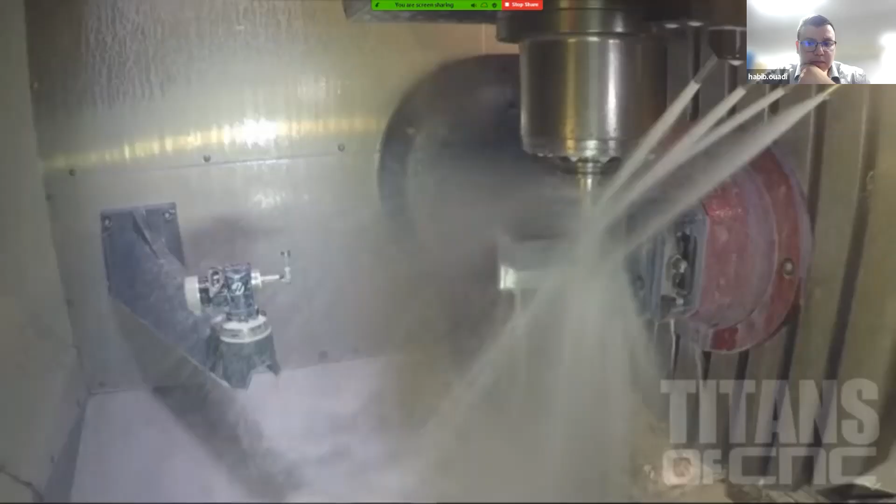I'm going to explain the difference between a manual machine and a CNC machine. Manual machining is dear to my heart. 20 years ago, when I got into this trade, when I didn't know anything, I was put on a manual machine. It's how I learned how to cut metal. A manual machine has hand cranks—we say hand cranking.

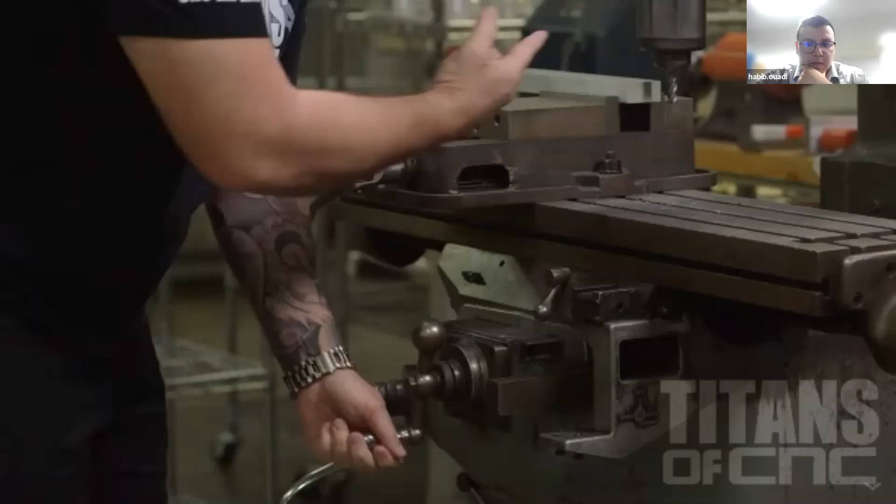In the Y direction on this machine, we rotate the handle to engage the tool into the material. In the X direction, we rotate this handle. In the Z direction, we lift up the spindle and lock it down. We also can engage Z-axis by raising or lowering the table—cranking the handle actually raises the table. So now let's go look at the CNC machine.

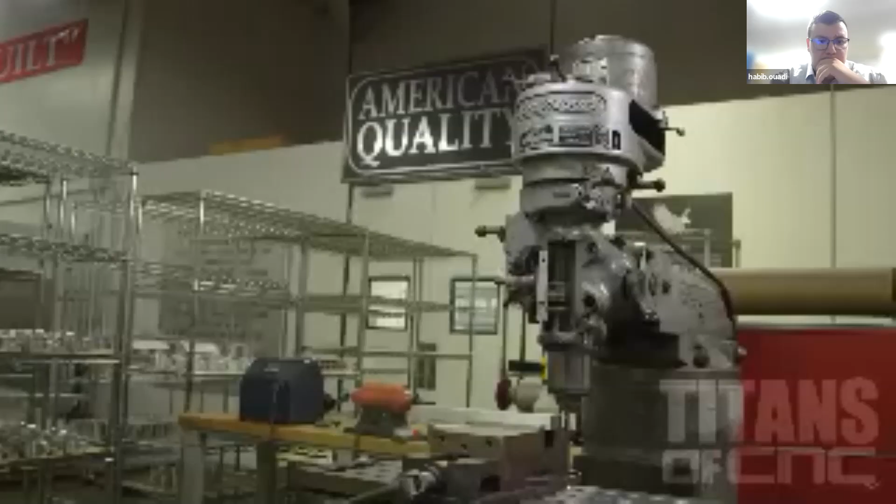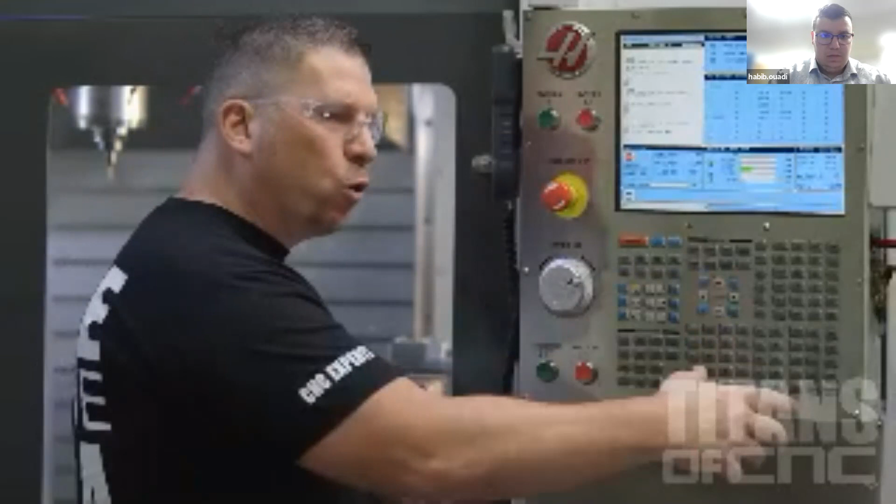All right, so here we have a CNC machine, computer numerical controlled. Just like the manual mill, we have the same axis of movement, but now we have servo motors actually controlling those axes. With the CNC machine, everything is automatic, and we run off of G codes and M codes.

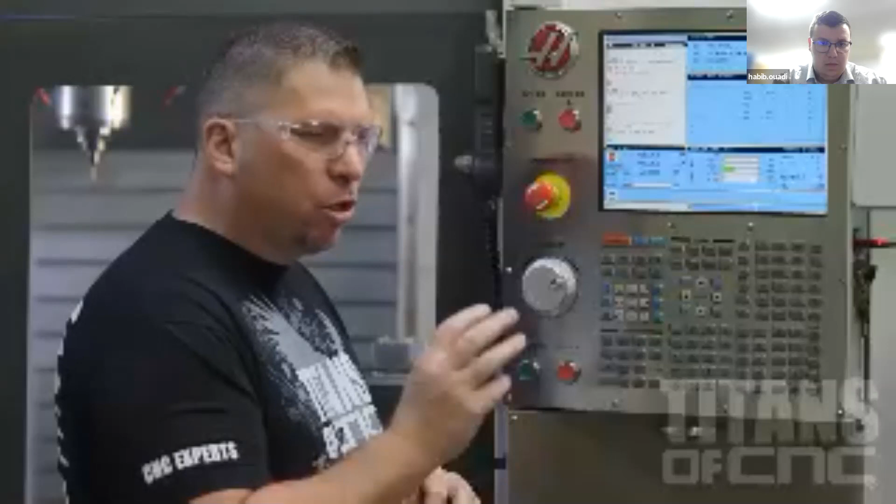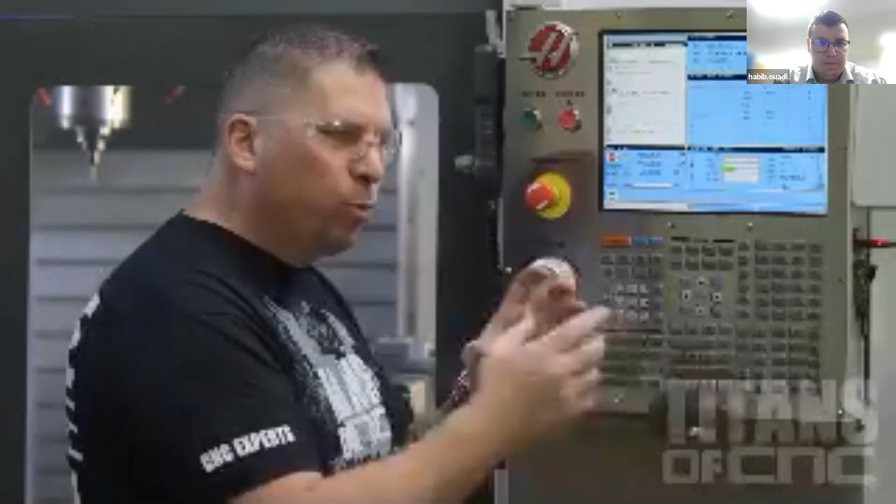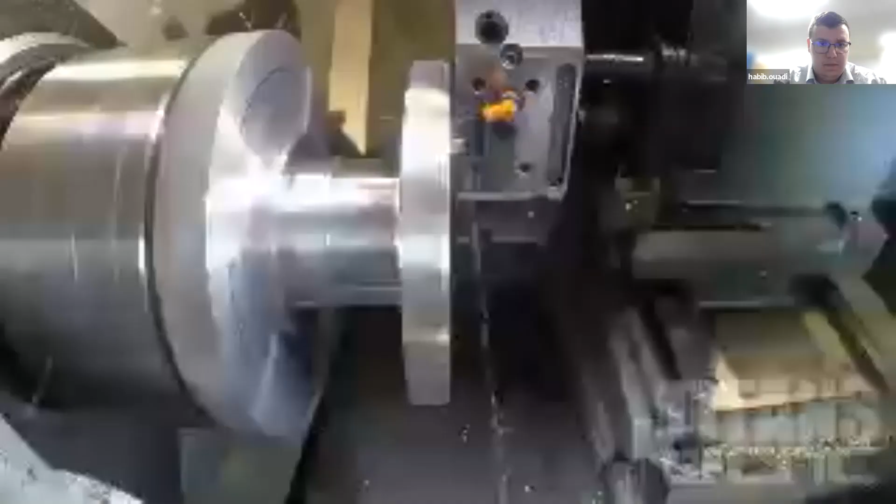The programs are created through a CAD/CAM system. We take a solid model and bring it into the CAD/CAM system, like Fusion 360. Then we call tools, call out profiles, and run the tools around the profiles to create a program. Once the program is complete, it gets posted. We then send the code to the machine. The machine reads the codes, grabbing each tool and running it exactly like we did in the CAD/CAM system.

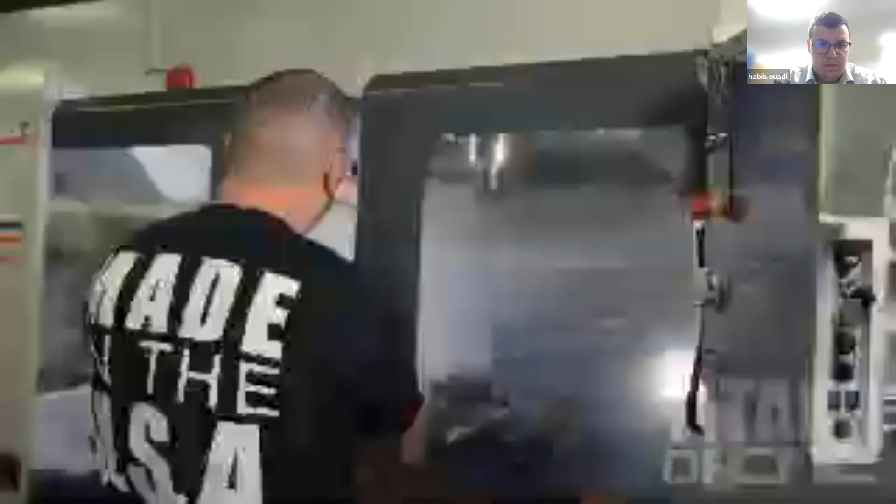You gotta grab all the tools, put them in special holders, and then put the tools in the machine. You have to zero all the tools to the part, and then zero the part, and then you're ready to run your program.

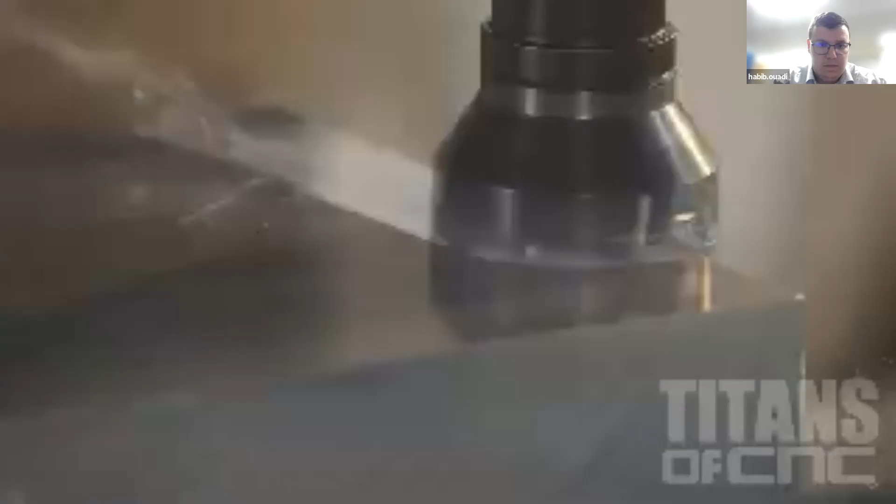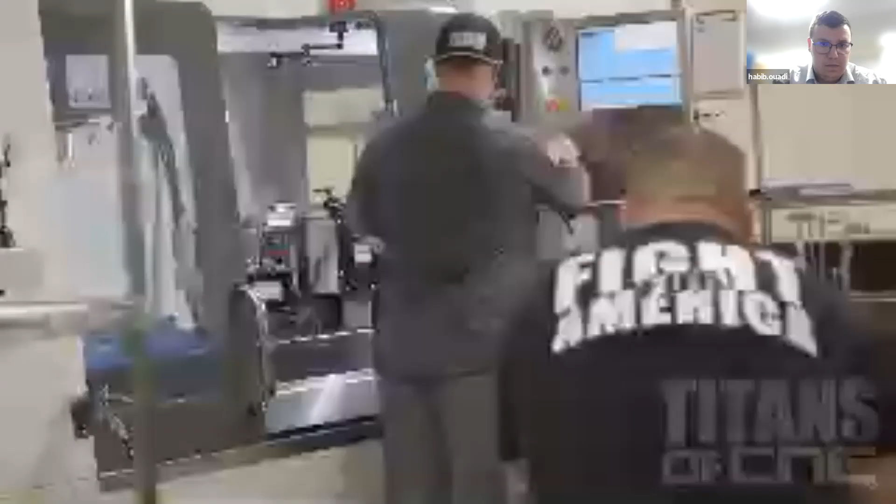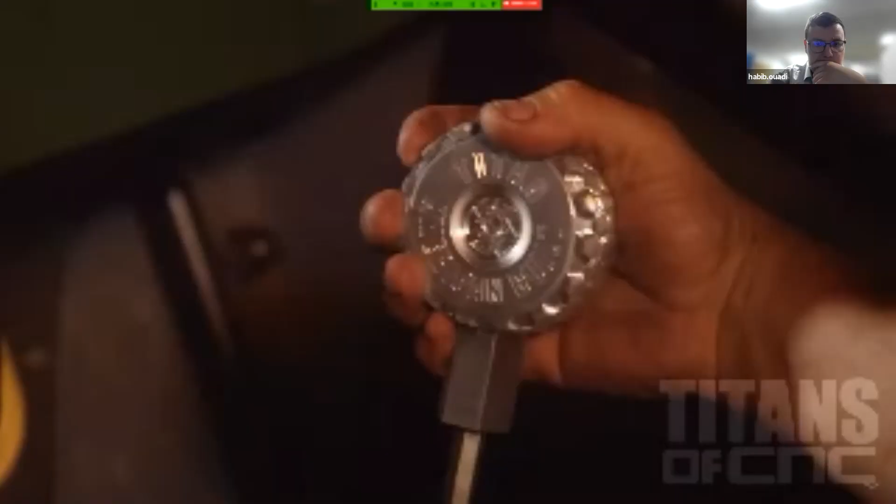When we look at runtime, manual machining cannot compete with CNC machining. You can make this machine run lightning fast, non-stop, with no operator. Everything is automatic and efficient. It keeps my workers busy. It makes me efficient. It allows me to quote work and get those jobs so we can make parts that go on submarines, on rockets that go to space, and everywhere in between. If I didn't have a CNC machine, I would not have the work and I would not be able to employ my guys. Taking it all to another level.

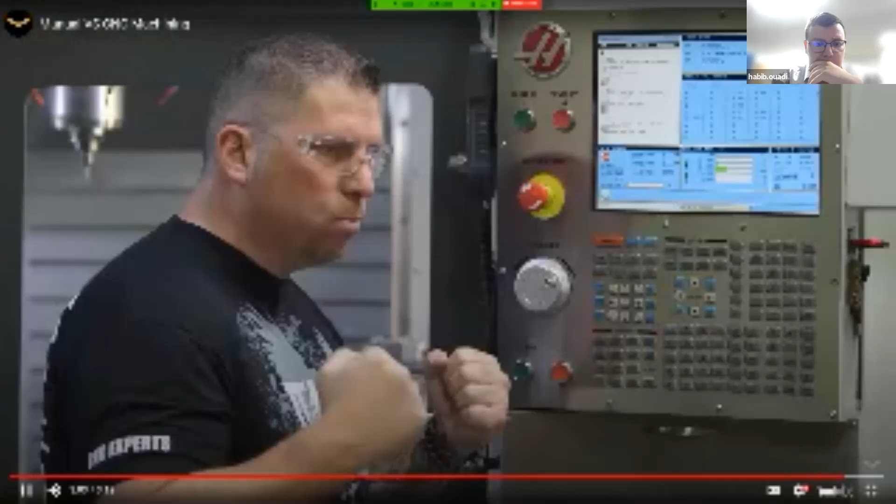All right, so I hope you enjoyed the video. Let me just go back to the slides, and while I come back, I would like to ask, what kind of keywords did you hear there in that video that will apply to what we are talking about today? Anyone?

Numerical control. Yeah, a program, control, code, runtime, fast, automatic, efficient. Exactly. Automation, right? Complexity as well, right?

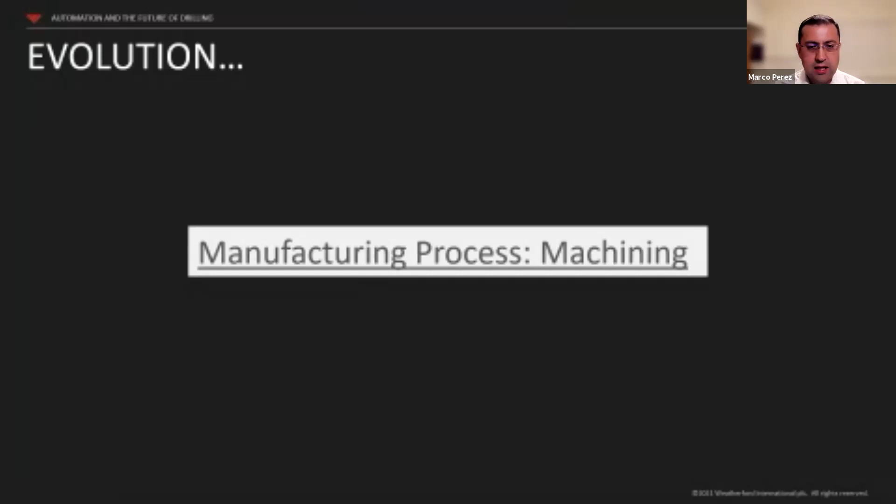I mean, he didn't mention it clearly, but definitely the type of pieces or components that can be manufactured on a CNC machine is far beyond, or far away, from what we can do with manual machining—or what they can do in manual machining.

In our world, when we are drilling, wells are not getting easier. They are getting more complicated every time, as we try to reach new targets—longer, deeper, higher temperatures, and so on. So our environment is not getting easier, it is getting more and more complex as we go. But as you mentioned, automation, running time.

They talk about zeroing in all the tools and all the pieces. So it has an additional time to set up, but then once it is set up, the running time is significantly shorter than if they have to manufacture that with manual machining.

So I thought it was a good illustration to see the similarities that we have and the challenges that we are facing in our industry, the oil and gas industry, and how other industries, in this particular case the manufacturing industry, have been evolving and basically being competitive and able to survive in that business environment. This evolution is not happening just because. There is always a reason to be more competitive, to be more efficient, and to make better business for the companies, whether operator, service company, whoever. At the end of the day, it has that reason. This evolution is good, but there is a fundamental reason for that.

So now digging deeper into the topic of automation, and again making an analogy to what we have seen in the vehicles we're driving today versus what we were driving 20, 30 years ago. Right now it is very common to have vehicles with, for example, ABS systems, the anti-lock system for the brakes, or cruise control, or a few other things like fuel injection.

And if we look at the reasons behind that, it comes back to what we discussed on the previous slide: safety, definitely it is important, and service quality. Service quality is what is going to make us more competitive. Whoever is offering better service quality is gaining market, gaining business. That is pretty much a must and is part of the evolution.

Now, the question is, is this happening overnight? Well, the answer is no. As I was just saying, the evolution in vehicles has been across several years. It is gradual but continual. We need to keep moving. We need to keep evolving.

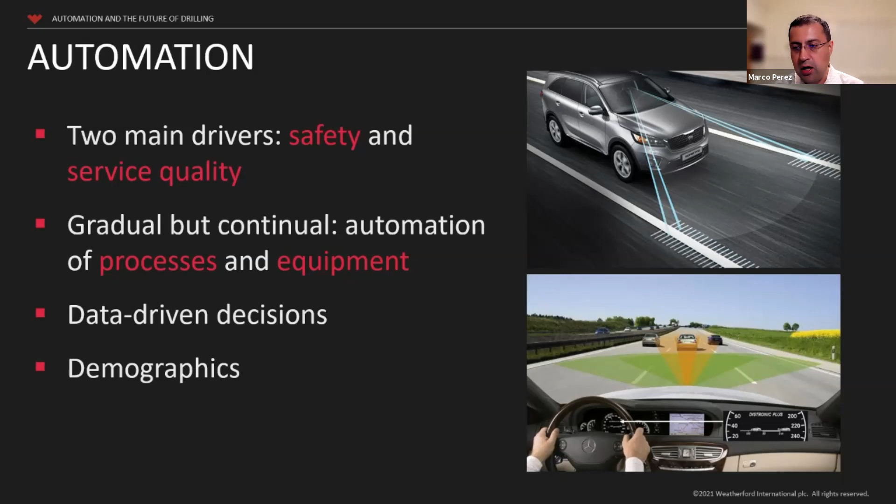So that is the other point that I want to highlight on automation and why we have this type of evolution in our industry, or we have been having this. Now, the foundation for the future, moving into the second section of this presentation. Based on our perspective, we have 5 main pillars on this foundation for the future.

The first one is data visualization. We have been making a lot of good progress on making the data available and being able to visualize it quickly and in the best possible way. The second one is embedded analytics. Obviously we have the data, but we need to be able to analyze it, as I mentioned before, to have data-driven decisions. The third one is basically an open architecture. We cannot just restrict our progress just to ourselves.

We need to be able to connect to other parties, other systems, and speak a similar language. We need to understand the same thing and be able to integrate into the major workflow of the process. Then the other one is the high frequency and high density of data, so that is all important to manage volume of data and integrate that with our analytics.

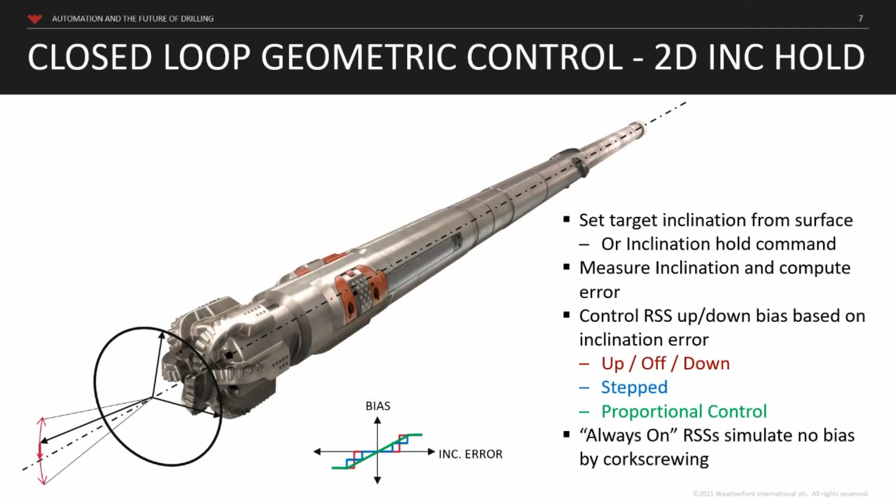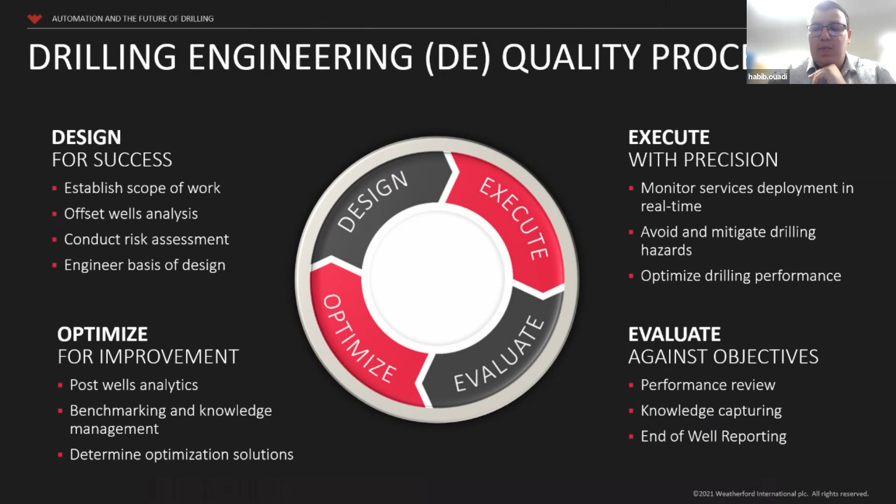Marco, I have a question regarding the previous slide. You said execution, and you said avoid and mitigate drilling hazards. Is it like taking decisions, or just how it mitigates, like detecting the problems or taking decisions? Right, so it is actually taking decisions, we call it interventions. Once we start drilling, I have an example in the next couple of slides. But during the execution, we have basically a driller's roadmap on how it should go sequence by sequence. If we have deviation from there, or if we foresee a risk coming up, we need to take proactive action to make sure we don't get into a bind. We need to probably control ROP or control ECD, or circulate more, or increase the flow rate, or whatever the case may be. But it is an actual intervention, that's how we call it.

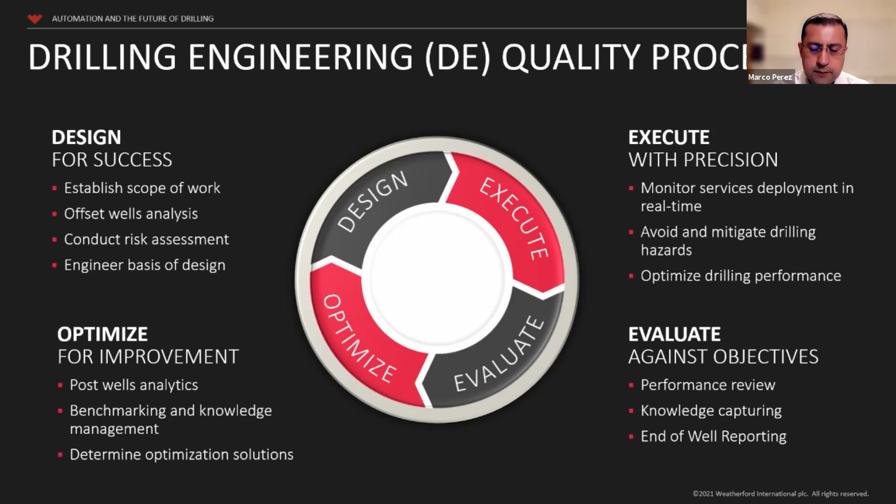Okay, so once we have our game plan, we have the design phase completed, what is the first thing that we need to do? Well, the first thing we need to do is start drilling, right? We need to start manufacturing the well. We need to start digging some hole in the ground. So now I'm not going to expand into the directional drilling here.

I'll assume you have some background on what a rotary steerable system or directional tool is. In reality, over the last 20-30 years, directional drilling tools have been evolving significantly. What I'm showing here is just an example of a rotary steerable system, and the key points we want to highlight are the most recent advances in this technology.

Right now, pretty much every well we are drilling requires a certain degree of directional control, even vertical wells. So in pretty much every well we will be having a directional control tool. There are two main bullet points I want to highlight here.

The first one is setting a target inclination from surface. This is similar to when you're driving your car and you press cruise control - your car goes at a certain speed that you set and maintains that. Basically, it's the same thing here.

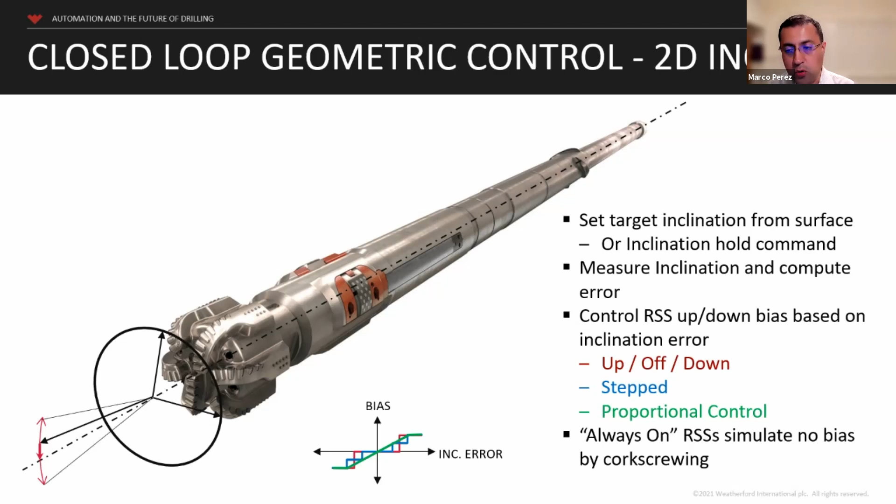When I was doing drilling engineering a few years back, I had to monitor 3-4 rigs, and typically communication was just email, or they'd send you the logs. You'd need to open or print the PDF, look at the log and drilling mechanics logs, and identify if there was an issue with the ECD, equivalent circulating density, or with the formations we were drilling. It just took a lot of time to do that process.

Every morning you'd start looking at the rigs and how they were performing, and it was just taking a long time. Even just plotting the directional performance - you typically had in the past a wall plot, and you'd have to plot surveys in there with a pencil and things like that. It was just taking so much time to do all that.

Now we have all these platforms to monitor, and not just to monitor - in this case it's automation of drilling engineering modeling tasks in real time. So we have all this at our fingertips, and that will make us more efficient. It will move us to the next stage, which was part of the question I got before: is it just monitoring? No, it is not just monitoring.

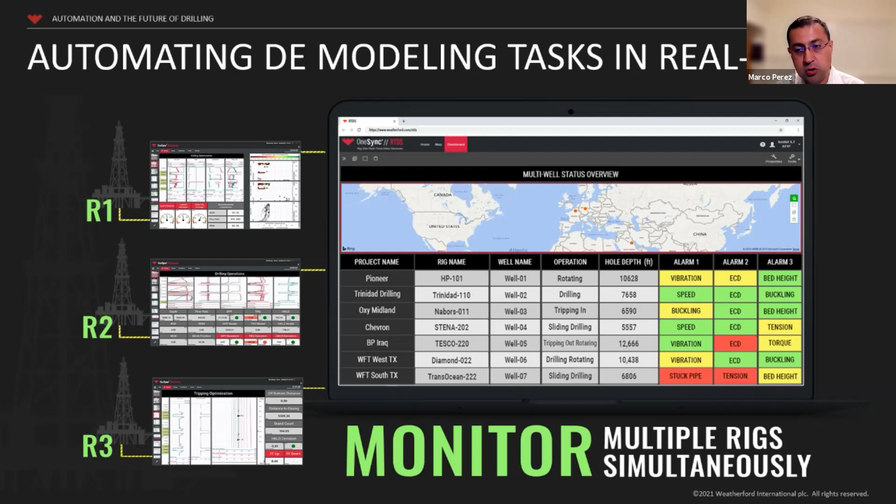Real-time vibration analysis. During the design phase, we evaluate the vibrations on the BHA, but then during execution many things can change. So under the new actual conditions, we run this in real time and validate that the drilling parameters we are running are giving us the best possible conditions for the BHA to survive the drilling environment. We have downhole sensors feeding back all this data into the surface system to evaluate the lateral vibrations, torsional vibrations, axial vibrations, and so on.

Now the MSE, the mechanical specific energy, is also a very important parameter. It basically tells us how healthy we're drilling this hole - are we using all the energy to really destroy the rock, or are we losing energy, for example in vibrations, or due to an issue like bit balling or whatever.

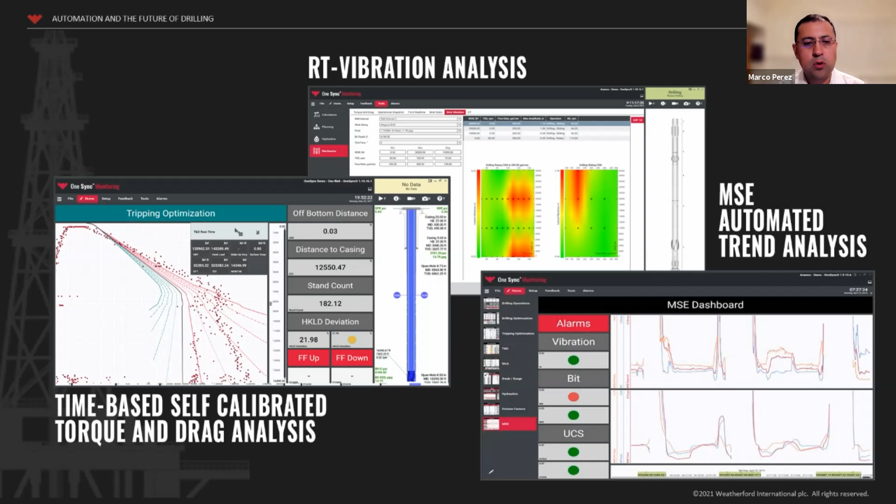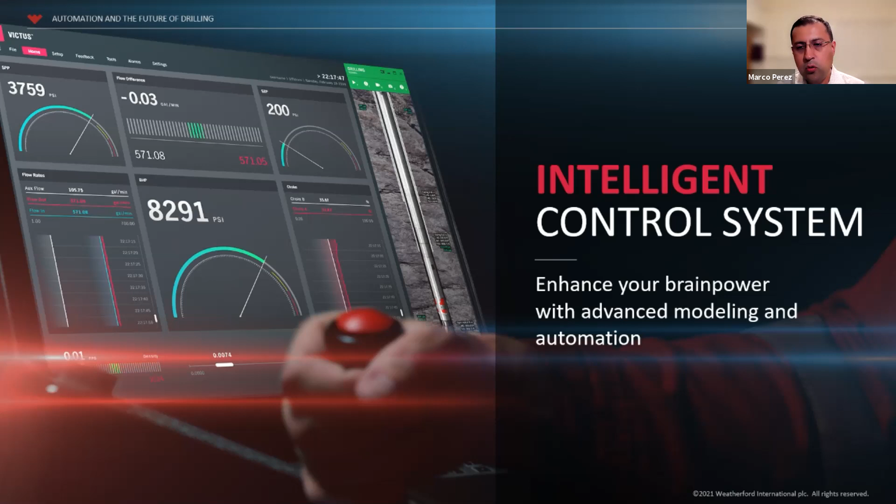Now, following the conversation about risk mitigation and optimizing performance, let me just briefly touch on MPD - managed pressure drilling. Probably you are aware of this technology, this type of offering that we have. Now what we have been doing with this technology - I mean, it is not new, but what is new is how do we control this. And to control this, let me just move to the next slide.

So what we have behind the intelligent control system is, first, the advanced hydraulics model - that's a given, so we have software, we can calculate our hydraulics, we can estimate our bottom hole pressure. Now we develop these smart control algorithms - we need to have this additional enhancement on our brain power, things that probably the human brain will not be able to detect or analyze in the time frame that we need to.

And then the integration of those algorithms into the PLC system, the programmable logic controller. So it is not just the model, it is not just the decision, the algorithm - it is the execution, the PLC in there. And then obviously we need to have a simplified user interface and alerts to the operator. So that is what is behind this intelligent control system. Now the benefits, the results, is condition-based monitoring - that is basically the maintenance program for the equipment that we have - and reliable automated reporting.

Obviously, we need to report what is happening and how we're addressing certain conditions, specifically how much back pressure we will be applying to keep the well in the condition that we want, and then remote control via a single user interface. So we were talking about having just one platform, one simple architecture where we could incorporate different systems into just one.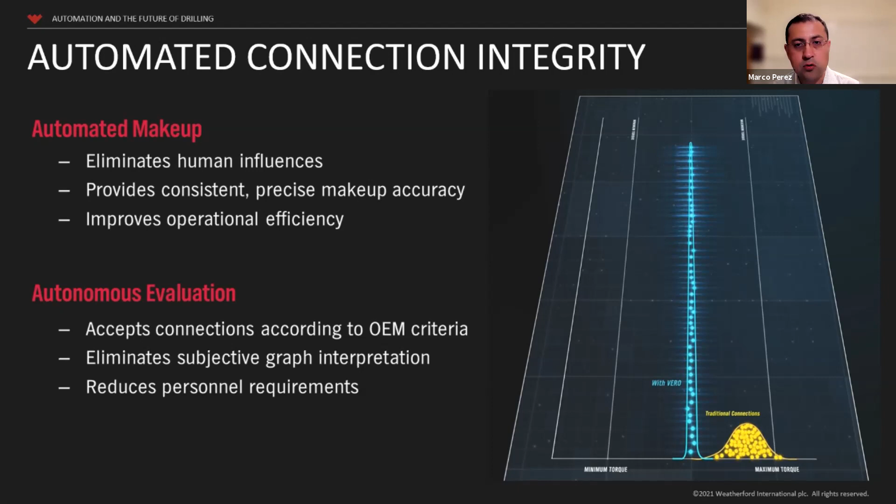Now, let's say we drill the well, we case the well, and it has the required integrity. What is next? Well, obviously we are drilling a well not just because—we're drilling the well to put it on production, or to enhance production if it is an injector, and so on.

We need to make it, to produce, right? So that is the objective of having this well and spending all this money drilling this particular well. Let me just quickly check the time. Yeah, we have a few minutes.

The objective here is regarding Industry 4.0, how we have adopted some of these fourth revolution concepts, taking processes optimized in other industries into the oil and gas industry. I'm not going to get into too many details, I'll assume you have some idea on Industry 4.0. But the point is how we can take those learnings and developments and apply them into our production environment in the oil and gas industry.

One of the main challenges was to integrate all the enterprise systems. How can we integrate all of them and have just one single platform for the operator to manage assets or manage the wells, and to adjust and get the data in real time, adjust the production and so on. So that is pretty much part of the automation.

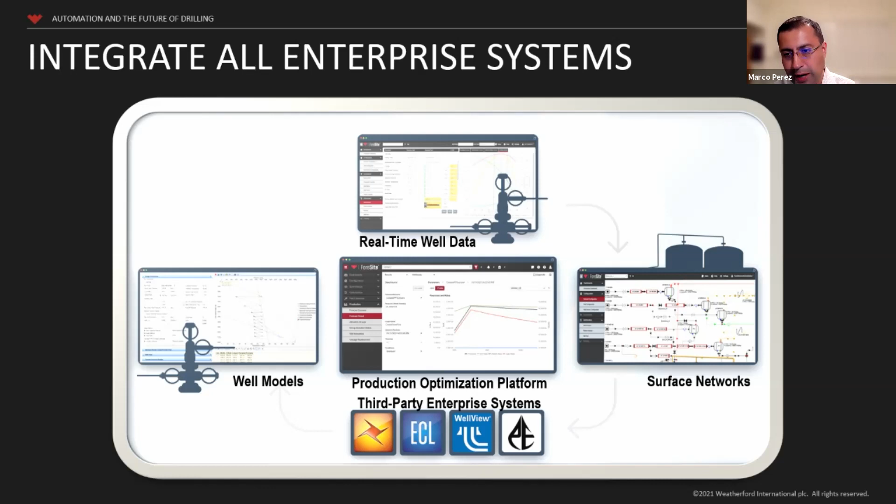Now moving into the third section of the presentation, the future of future technology. What else do we foresee going forward?

Let's step back a little bit and think on what we are doing. We're drilling wells, putting wells on production. Typically the operator has a certain number of rigs and wells that they need to drill and complete in a year. When the drilling managers and operations managers get that information, first thing is just instinct: they try to drill as fast as possible to meet the manufacturing schedule set at the beginning of the year. That sometimes deviates attention from the details that really impact the long-term goal.

In my mind it's basically drill smarter, not just faster. It doesn't mean drilling faster is bad, it just means that sometimes we focus too much. If you just focus on ROP, on drilling faster, looking at days versus depth, it is not going to get us to the end goal. It may give us a good leeway into the initial part of the rig schedule, but it's not going to efficiently meet all the manufacturing schedules.

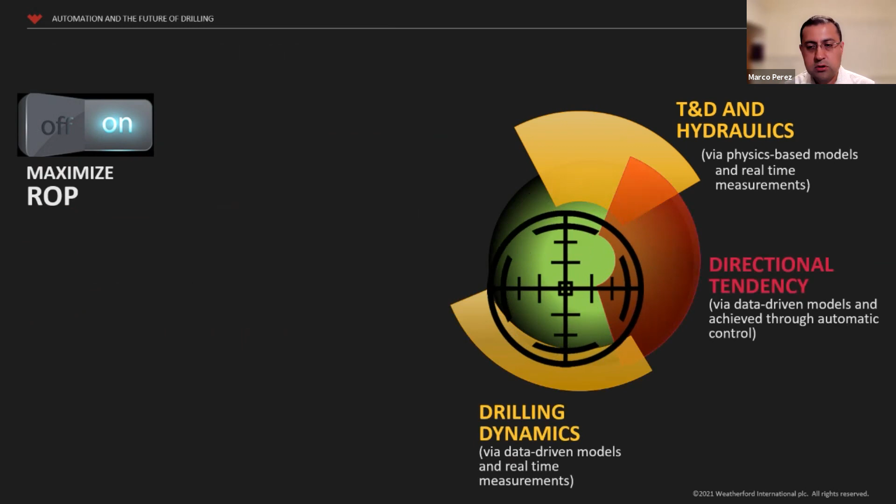So as I said before, while the ROP is high, everything looks good and there's no issue. But if we start having problems, they can get escalated quickly if we're not prepared to manage those contingencies. So the point is we need to think on how to maximize ROP, but not just looking at ROP, looking at all the variables you see in this image on the right.

How can we target the ROP that is optimum for this particular operation, based on the rig capabilities we have, the well profile, torque and drag, hydraulics, directional tendency, drilling dynamics, wellbore quality, and the hole cleaning pressure and ECD management - and optimize all of that.

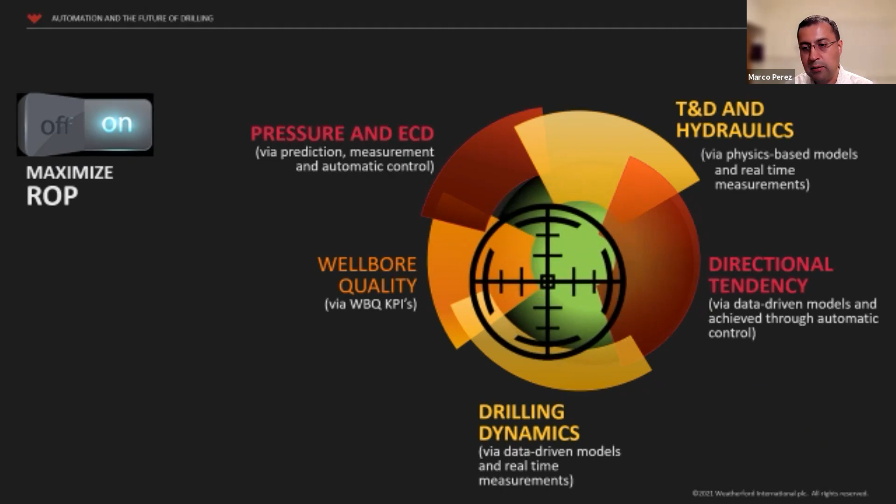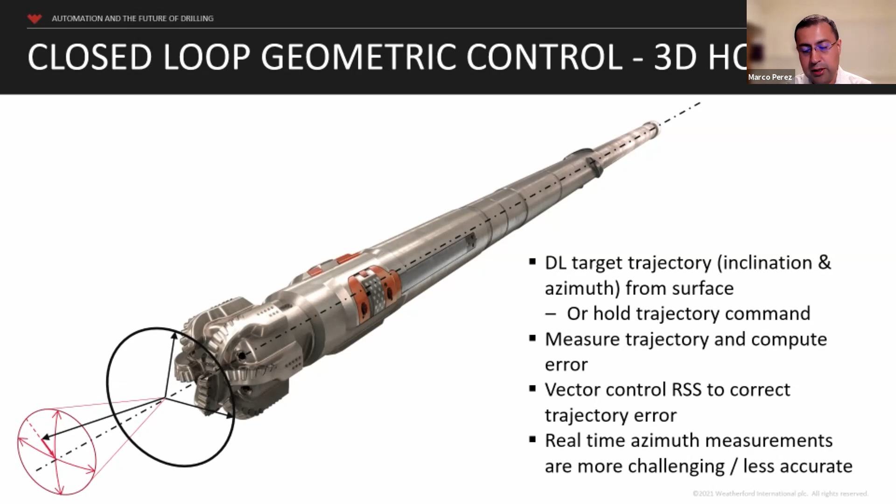So that is where the next step is, that's where we think the future is, and by having that, we think it's going to be a major differentiator.

The other one is production, right? Many times when we drill these wells, not all of them are laterals or require geosteering services, but many of them do, and especially with one well, if you can navigate through this pay zone and extend the length of that lateral and extend the exposure of that formation, it will translate into better production for the operator, right? Better well, better asset that the operator can keep.

So getting into the conclusions here, let's see, yeah, we still have time. So the first one that I have is manufacturing and industrial practices have been leading the recent oil and gas evolution. I think there is a great similarity between manufacturing wells and manufacturing another component, not just in the technology being used, but also in the processes being used.

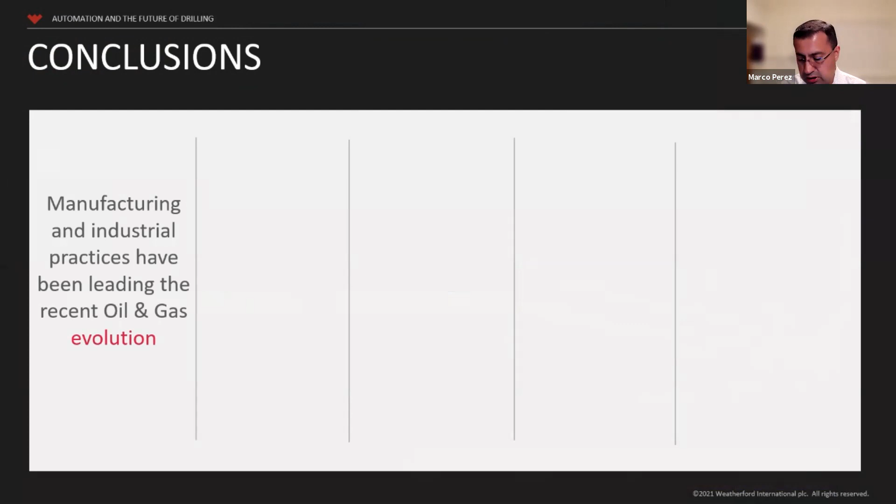Unfortunately, I think in our industry it is taking a little bit longer. We have a few roadblocks that probably didn't allow us to move forward at the speed we would like to. Some of that is probably misconceptions of the price of doing that, or the price of evolving, and the return on investment.

I think those are the main things. Now, obviously, we must continue working on future endeavors. We need to keep moving this forward. And as I said before, this is not just one service company, I think it's all service companies. Obviously, early engagements on universities just like this, I think they are crucial to keep moving this forward.

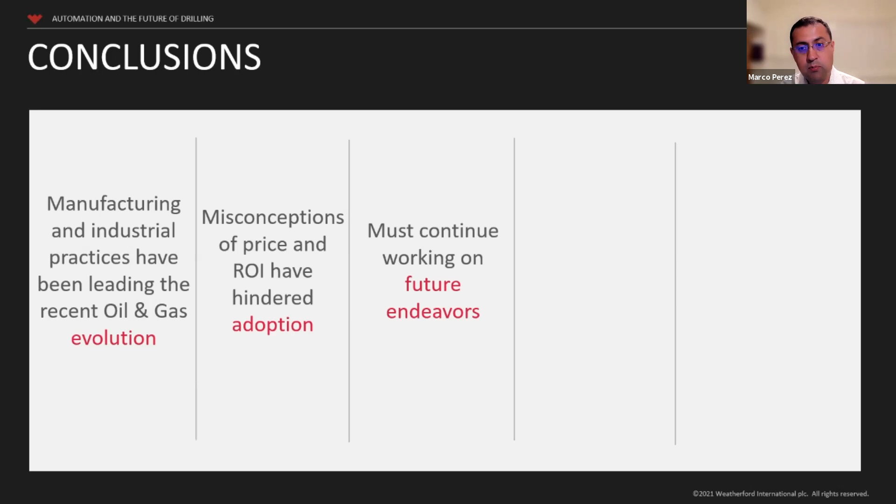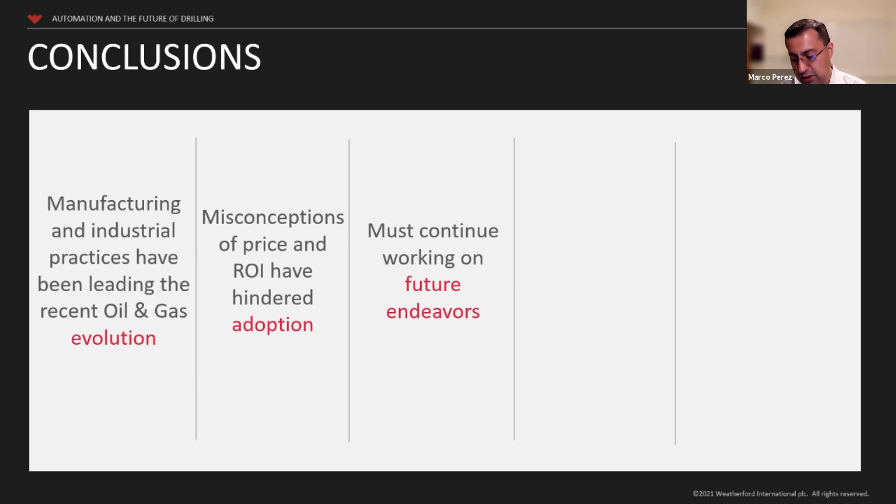At the end of the day, what we want to do, or what any service company wants, is to deliver wells earlier and produce more for longer. That's why I touched a little bit on what we are doing in terms of production, and on drilling and geosteering more efficiently, basically automating that part. Data-driven decisions, knowledge sharing, it is crucial, it is very important, and I think automating many of our processes breaks a lot of silos, a lot of information that could stay in just one person or one laptop. And at the end of the day, I think it's going to improve consistency and operational performance.

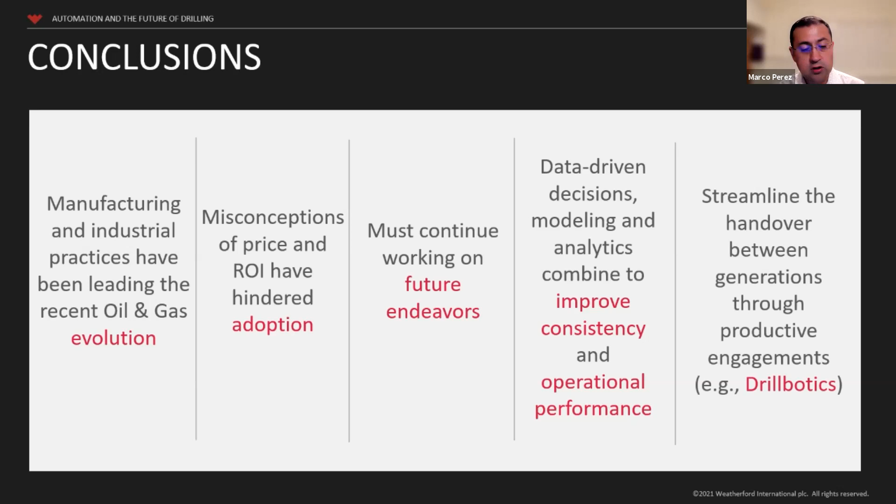That is very important. Now, the last point I have here is to streamline the handover between generations through productive engagements. One example is this one that we have now. Drillbotics is very important. I believe the University of North Dakota is participating on this. I used to be part of the judges. We still have one of my global senior drilling engineers engaged on this. Drillbotics, it is very important to exchange and close that gap between service companies, operators, and universities. Very good ideas have come up out of that.

What I encourage you is to not just focus on your petroleum engineering area, explore what mechanical engineering and the other guys are doing, because I think at the end of the day we are all engineers. We're trying to get this automated and obviously a better world for everyone.

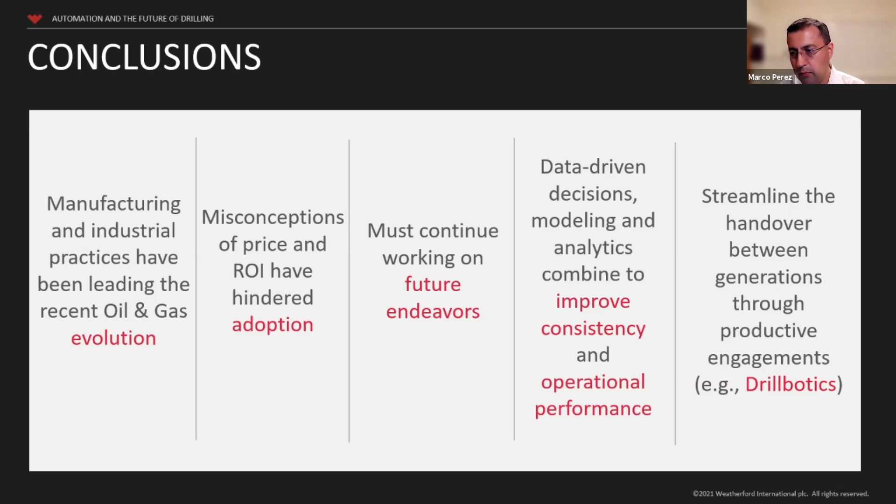Thank you so much, Mr. Marco, for your presentation. I have actually two questions.

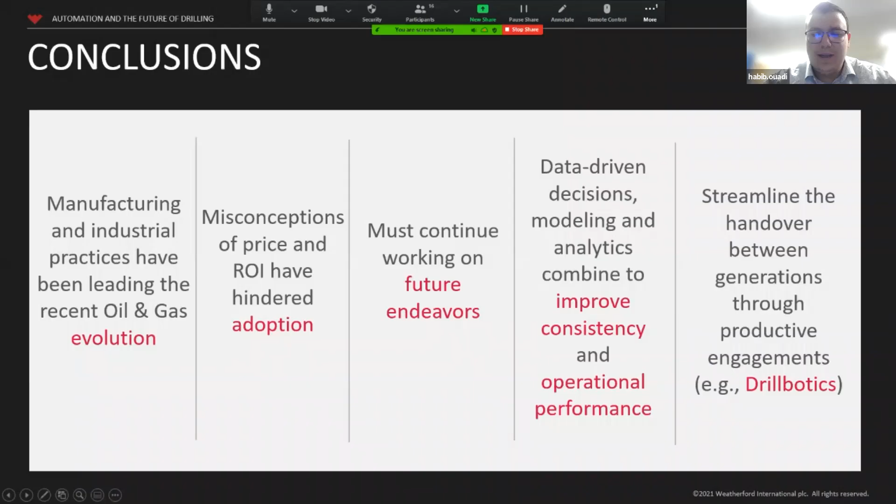Based on the slide where you presented the different factors to take into consideration, instead of just looking for a high ROP, are we able to enable a fully autonomous decision-making drilling system, one capable of adapting itself to various drilling conditions? For example, being aggressive when drilling goes fast or the operation runs smoothly, and being more cautious when downhole drilling conditions deteriorate or there's a problem with the downhole tools. This is my first question.

I have another question too. What about well control automation and well completion? Will the system be capable of working within the drilling mud window? Yes, these are my two questions. Thank you.

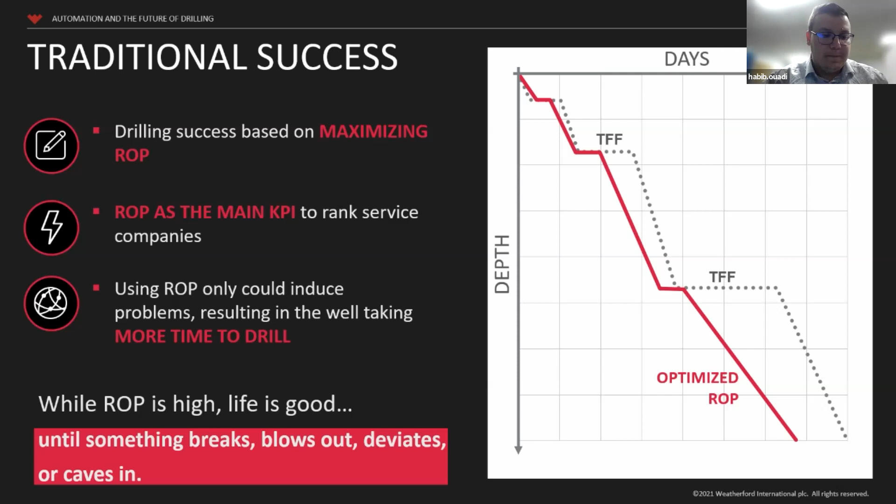Okay, so definitely the first one. When we talk about ROP, it's a great approach, right? It's not just with automation and having the ability to integrate the design and execution phase. It's not just on and off. Definitely there needs to be a component to make it automatic, but also smart enough that wherever we could go with higher ROP, we should be able to do that.

Now the basis for that, I think, is what we call the driller's roadmap. Basically, on paper, it's a sequence of operations with certain parameters that we need to follow. As we are executing, if we have deviations -- as we saw on one of those slides comparing the model versus the actual -- if there's room for improvement, yes, definitely we need to go for that.

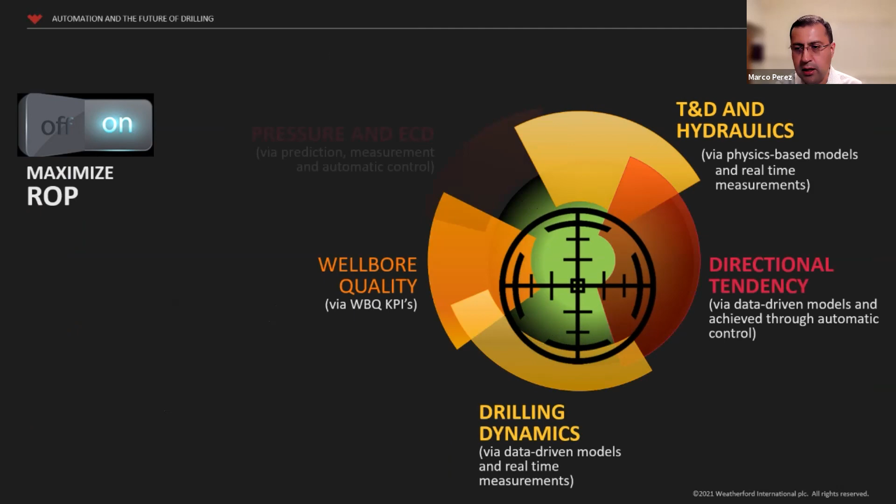So that is also part of what we have in here. Let's see, not this one. So these actions coming, it's not just based on ROP, it's based on all these geological risks and the impact on reservoir performance. Being honest, we are not there yet, but that is, let's say, the basis of design for this particular solution.

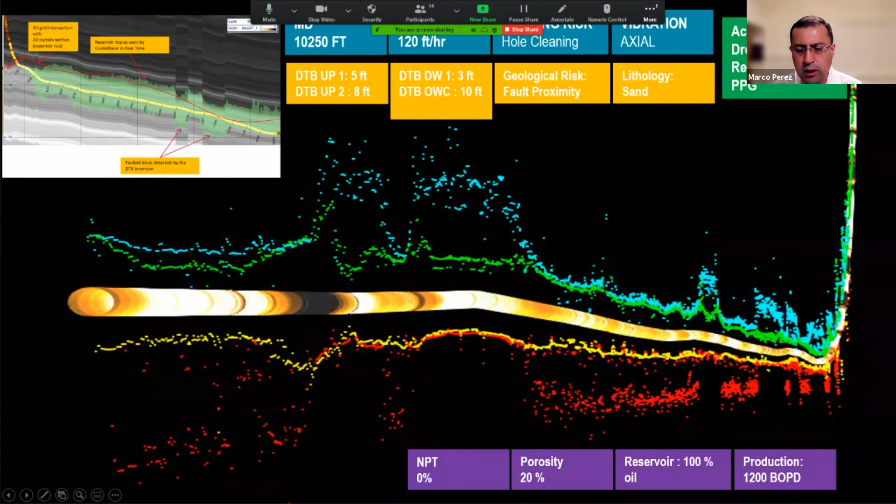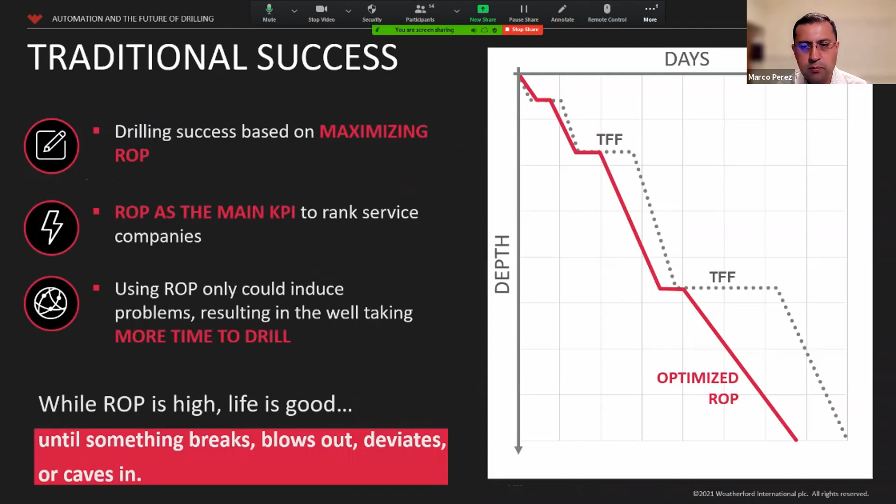Now coming back to the MPD solution I was presenting, yes, that is an optimization to stay within the pore pressure window, and that's what we are doing with these systems. At the end of the day, not every well requires or has a very narrow mud weight window, but we've seen a lot of good potential to use this even outside those scenarios, to ensure we have good borehole quality to allow trips in and out, and even running casing in the hole.

So I'm not sure if I answered properly. The second question -- the first one I think I did, but the second question I'm not too sure if that was the question, or if you want further discussion.

Yes, if it's possible to have more details on well control, so detecting high pore pressure or a high production -- how can the system differentiate between production and a kick?

Okay, well, when we are drilling, definitely we have our -- I didn't put in here all the hardware we use on surface to control this. Now, this is not a 100% well-control system. This is mainly an optimization system to make sure we have a good balance in our pore pressure environment.

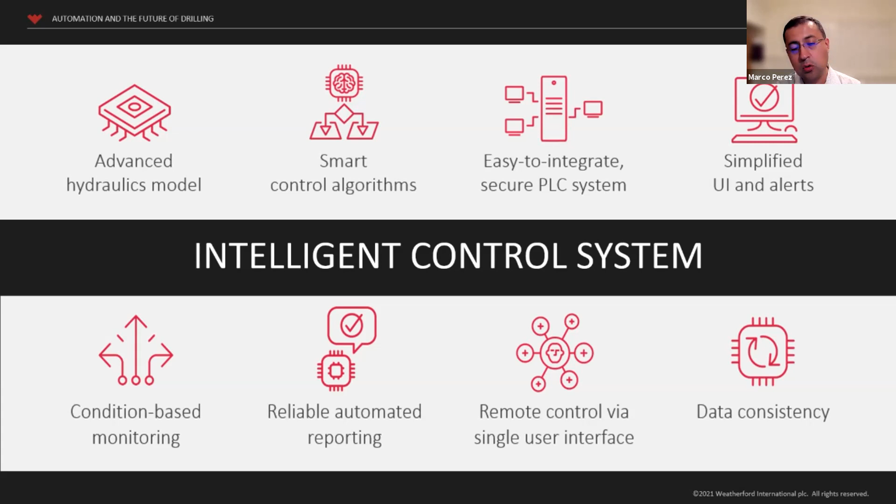We have a way to measure and estimate how much back pressure we can apply in a particular scenario, and that's where this PLC system comes into play. We put certain parameters, certain boundaries on what we need to have. We have control algorithms that will see how much flow we're getting back, how much flow we're getting in, how much flow we're getting back, and then how much pressure we need to apply. Sometimes we combine this with the PWD system, the downhole sensor that gives us annular pressure, which we have on some of the BHAs. Based on that, we manage to keep or control that back pressure, and it's all via these PLC systems that we have.

Okay, thank you so much. Thank you so much. Right.

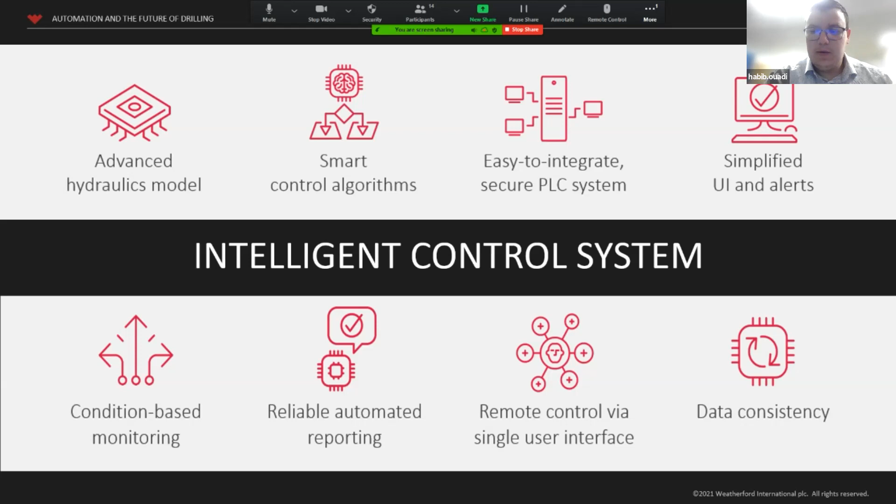So, do you have any other questions? I think it's two -- just to mention that we have actually, I have a couple of quick questions. Go ahead.

My name is Ahmed Ismail. I'm a PhD student in the petroleum engineering department at University of North Dakota.

I have a question about the current state of the art. I've been following most of the presentation, but I don't know what is the current state of the art for the technology or the models. So the models or ideas that have been presented, are they all implemented at industry scale, or are they still under research? How far are we at this point?

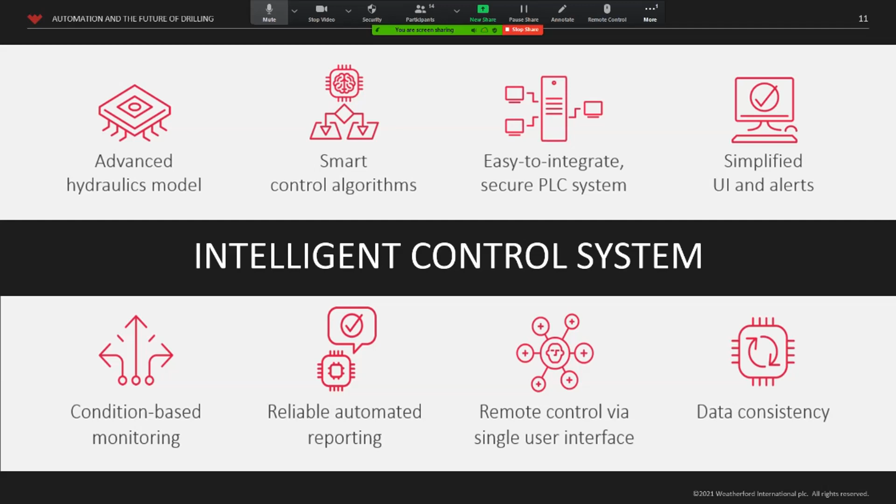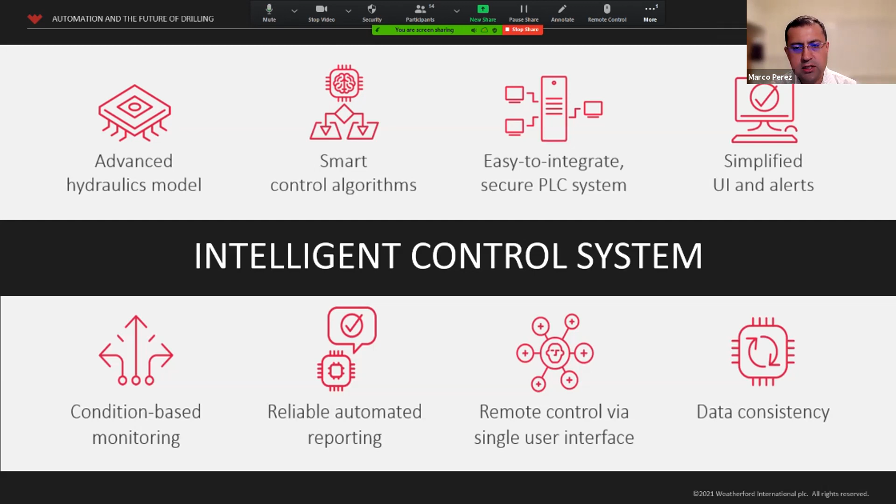Okay, yeah. So what I presented in the second section, which is the foundation for our future, that is fully implemented, right? All this is implemented at industrial scale, as you mentioned. All this is available. What is not yet implemented is what is under this future technology section. Basically, this ROP optimization area, the geosteering area, it is not implemented yet.

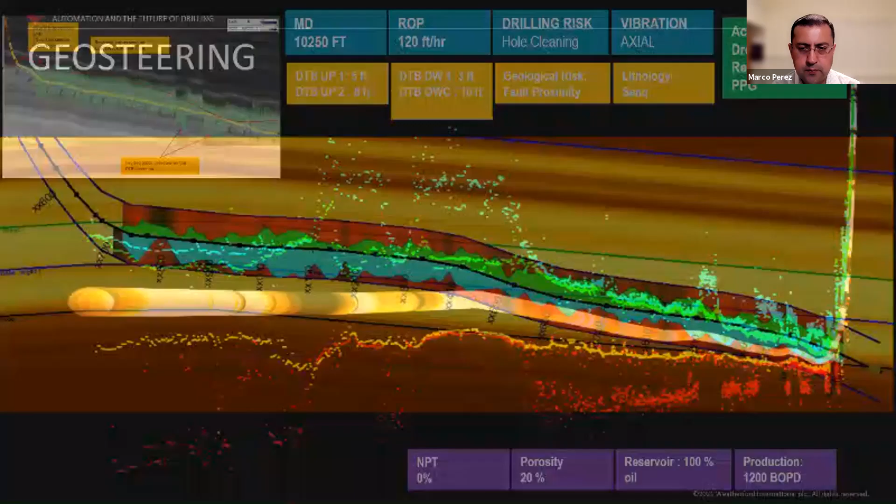A second question, I'm not sure if I missed it or it wasn't included. How's machine learning and data-driven models, or artificial intelligence, used in combination with the PLC models to basically reach the decision? So as long as I understand, we are trying to replace human decisions with machine-made decisions. So in PLC, for example, you have to write certain code following specific scenarios versus machine learning or artificial intelligence, where you just learn from the data you have and your previous experience. So how are those two aspects included in the same model?

All right, I'm just trying to rephrase the question and make sure I'm getting it right. So what you're mentioning is, how do we replace that human judgment, if it is due to data analytics or if it is actual programming? Is that right? This has been a question for me for a long while, like how are both concepts put together, using data-driven models with just making a regular logic code. If you see this, then do this, or if the range of, let's say, ROP exceeds this limit, and the weight on bit goes to this range, then your next step is going to be like this. So pre-predicted scenarios versus data-driven models.